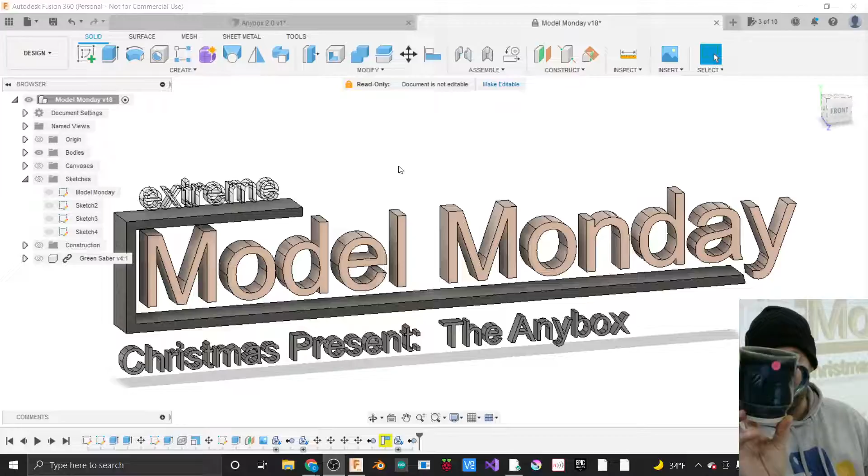Here's something I pulled off of our pottery wall. So if you're short a gift for somebody, we've got a lot of pots for sale over in the Mr. Rogers Pot Shop here in the Milwaukee Makerspace. And unfortunately, there are no boxes with any of those pots. And a lot of the stuff that you make doesn't have a box, so you got to wrap it somehow. And it's much easier to wrap a box than it is to wrap a mug or a bowl or a random project you made here.

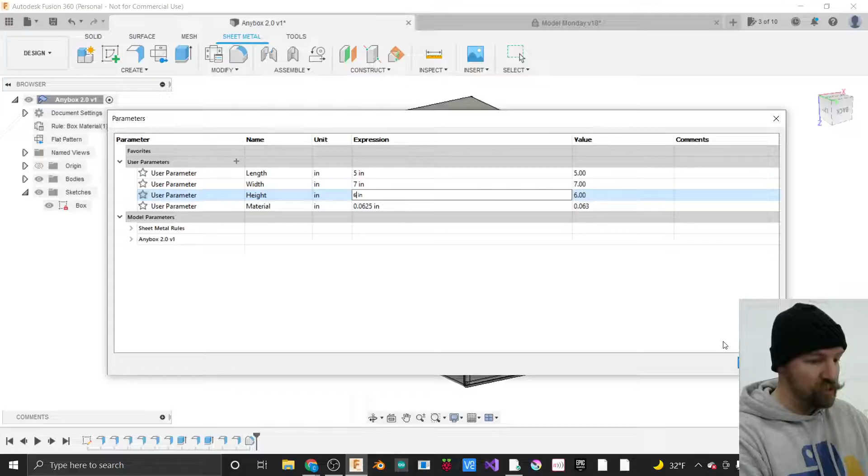So the idea is we make custom laser cut boxes. Here is a box, and this box I call the AnyBox because you can change its sizes by changing these parameters here. So I've got a length parameter, a width, a height, and then a material thickness parameter here. And I can change those measurements based on the gift in front of me, and then push OK, and then I have a new box that I can laser cut out and fold up and stick my gift in and then wrap it.

So without further ado, let's kind of just jump in. So I'm going to close my AnyBox project here. Let's choose to save it just in case. And I'm going to open a new document here. So I'm going to come up to my new design plus button up here in my tabbed workflow up here at the top. And I've got a blank document open here.

So now we can start by creating a sketch. You know, in general, we start by creating sketches, and then we take those sketches and we turn them into three-dimensional shapes. And we're going to do that same procedure here. So I'm going to click on my Create menu, and then, you know what? Let's pause. Before we create our sketch, let's create some parameters first.

So I mentioned we were going to use, this is going to be a parametrically driven box. So if we first click on the Modify menu here, and we scroll down to the penultimate option in this menu list here, which is Change Parameters. If we choose this Change Parameters option from our Modify menu, we get our parameters window that opens up here.

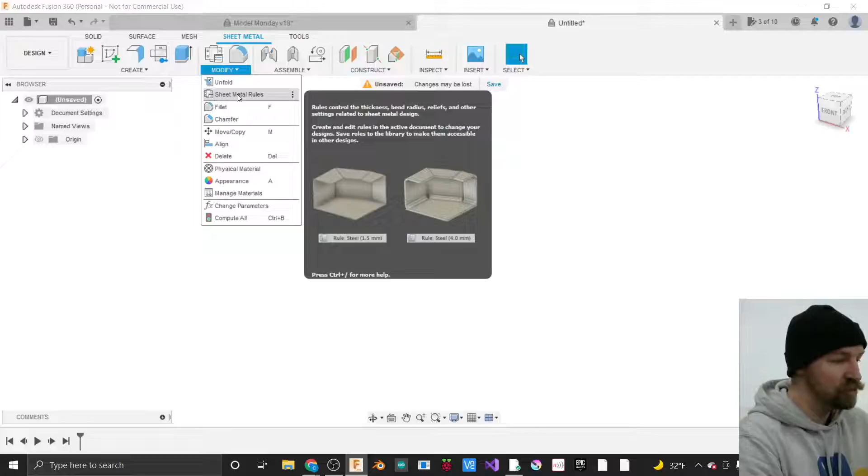Now I probably have more options here than you guys do if you haven't used sheet metal before, but I'll make a new one just like you would have to. In order to make a new sheet metal rule, hover over an existing rule and hit the new rule option that pops up next to it. Next to any one of these, we'll have a new rule option that pops up.

Now we've got our new rule window, and we can call this something—I've called it cardboard before. In fact, I don't have one called cardboard here. Cardboard. And then we can give it a thickness, and the thickness of this cardboard is a 32nd of an inch for myself, but feel free to make it whatever thickness you want.

Our K factor is going to be half of that. Usually for most materials, our K factor is half of our material thickness. So if it was a 32nd, it's a 64th.

Now, like I said, you can do math here too—so if your material is 0.03125 thick, I could just say divide that by 2. Oh, I lied, I can't do math in this K factor field—it won't let me do pluses or minuses, it only lets me type in numbers here. So half of 0.03125 is like practically nothing—0.015625?

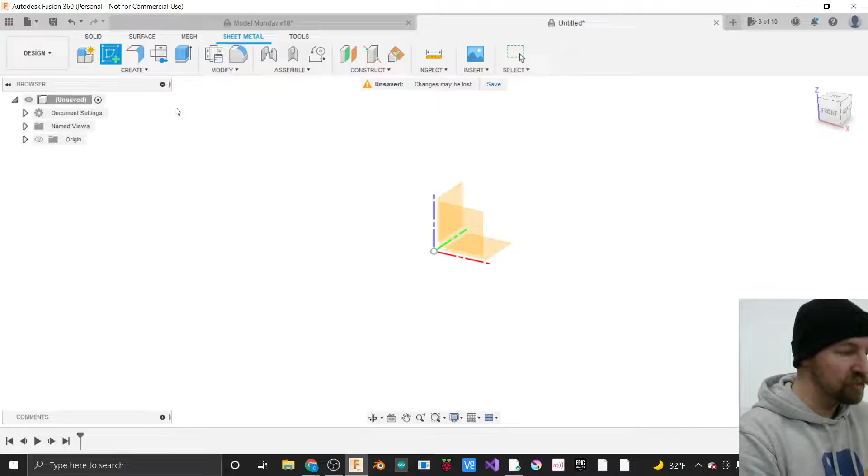Now once I choose to create a sketch, I've got to pick a drawing surface to draw on. We've got these 3 yellow imaginary surfaces out in our workspace, and I can pick one of these 3 imaginary workspaces to start my 2-dimensional drawing on. I'm going to go ahead and choose the one between my blue and my red axis here, my front. When I do that, I'll spin around and be looking right down at this 2-dimensional surface.

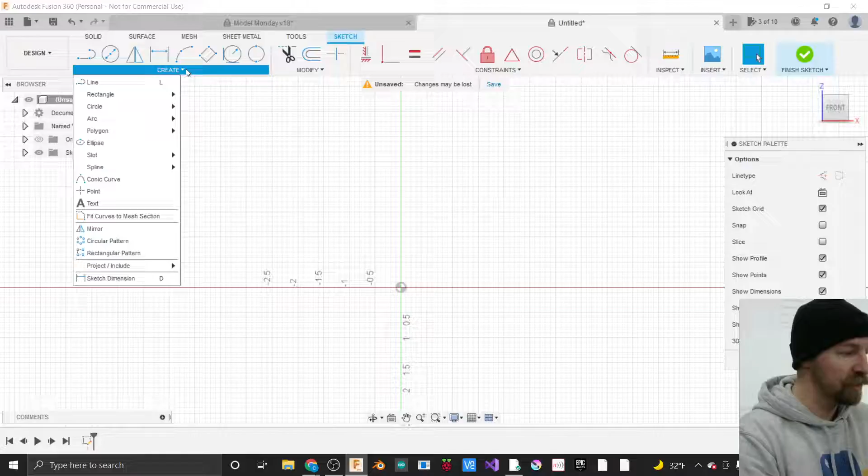And we see I've got all my drawing tools up here at the top. All I need to do is draw a box. So I'm going to come to the Create menu and come down to Rectangle. I'm just going to choose a 2-point rectangle. You could make a center rectangle if you really wanted to, but I'm going to choose a 2-point rectangle here.

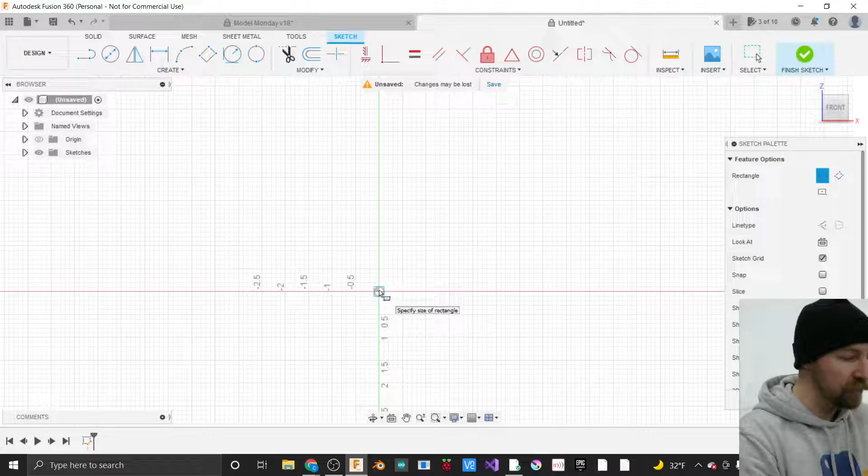I'm going to click to place the first point of my rectangle right at my origin, right at the middle of this workspace where my axes converge. I'm going to click to place the first point, and then move my mouse out. Now here is where we would normally start typing in some numbers. So I would type in like 5 inches, hit my tab key, type in 4 inches, and start making my shape that way.

But we've got... What did you do to get to the rectangle? Oh, so I went to Create, and then Create Sketch. Oh, okay.

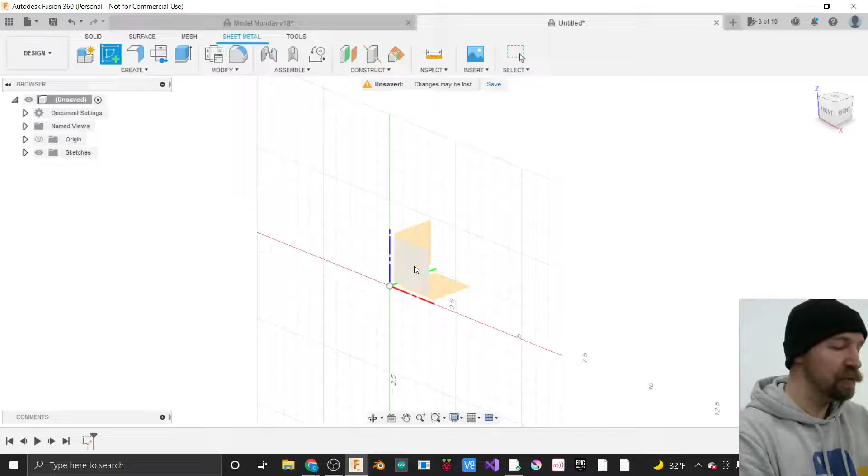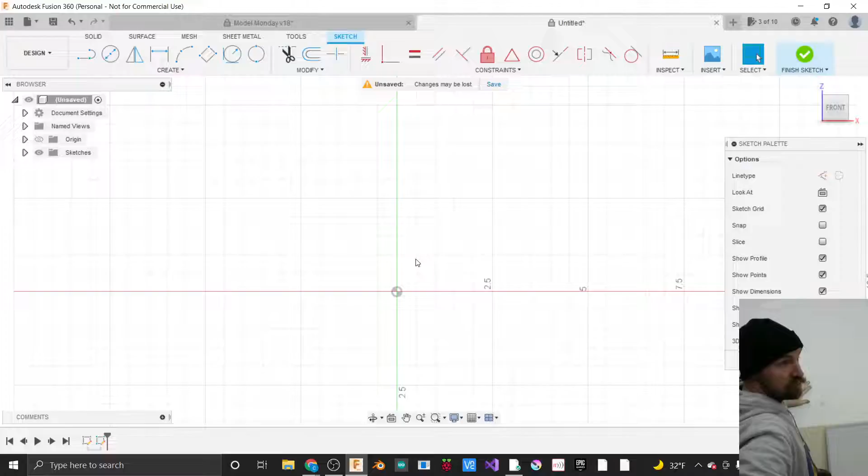And then we've got these 3 drawing surfaces that we can pick from. You just need to select one of them. It doesn't really matter which one, but you just need to select. This is like a 3-dimensional world we're looking at. These 3 yellow squares are like imaginary 2D surfaces that we can start our drawing on. So like in this room, you couldn't have started sketching in midair, but you could start drawing on this wall. You should not draw on this wall because this is the makerspace and walls are not for drawing on. Those three surfaces are kind of like the walls and the ceiling. You have to click on the plane.

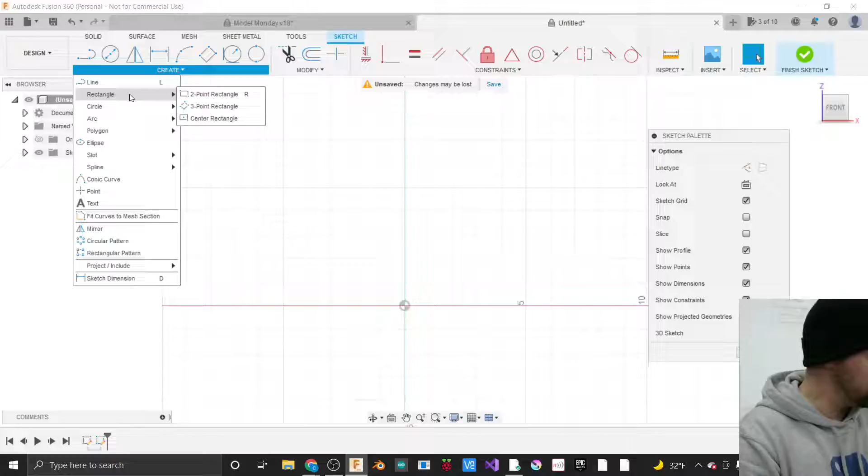Cool, so now all the tools at the top have changed. We're now in our sketching environment. We've got our sketch palette, and that's how you know you're editing a sketch. Now that we're editing the sketch, we can create some geometry on it. So in this Create menu, I'm going to come down to this rectangle option, and choose this 2-point rectangle.

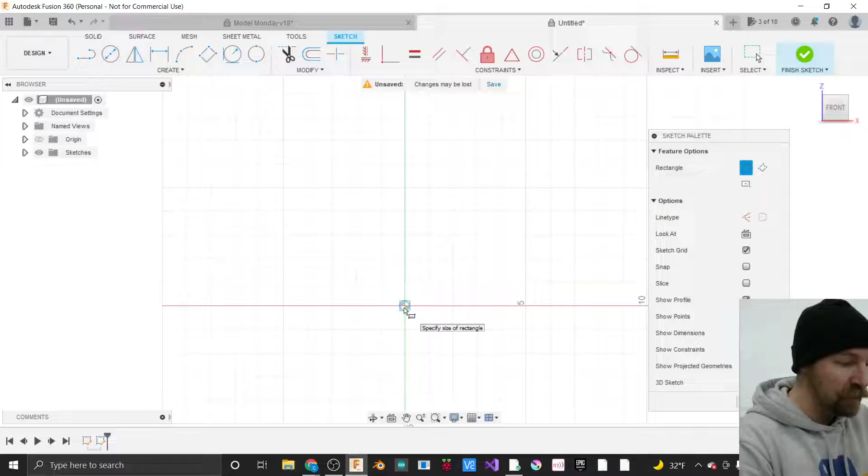Fusion is great about tooltips. So if you're ever not sure what you're supposed to be doing, if you just stop moving your mouse, it's going to tell you what to do, which is great. I'm good at following directions. So it says I'm supposed to place the first corner. I'm going to click one time and place that first corner. And now if I stop moving my mouse again, it says I'm supposed to specify the size of a rectangle. So if I move my mouse up, now I could specify that size.

We could type in a unit here, or we have specified user parameters that we're going to use. So instead of typing in like 6 inches, I could type in one of my user parameters that I named. So like this is going to be my height. If I start typing in height, I get that height user parameter, and I can hit enter to select it. Now if I hit the tab key, I bounce back and forth between my two units of measure here. Let's call this my width.

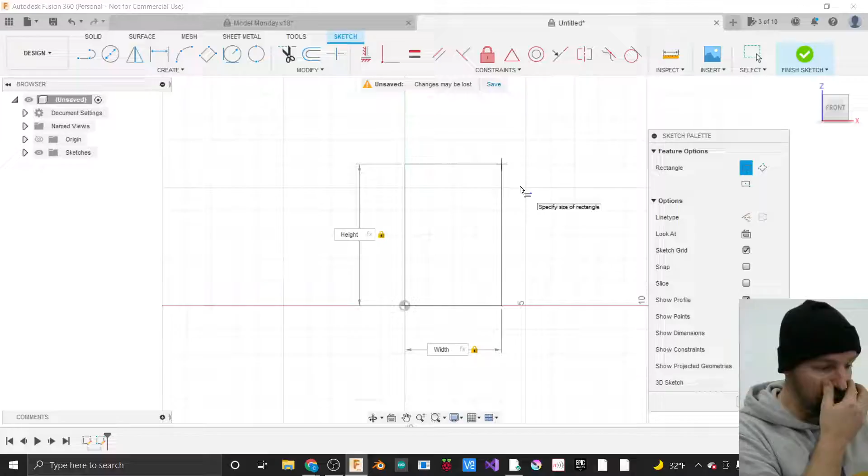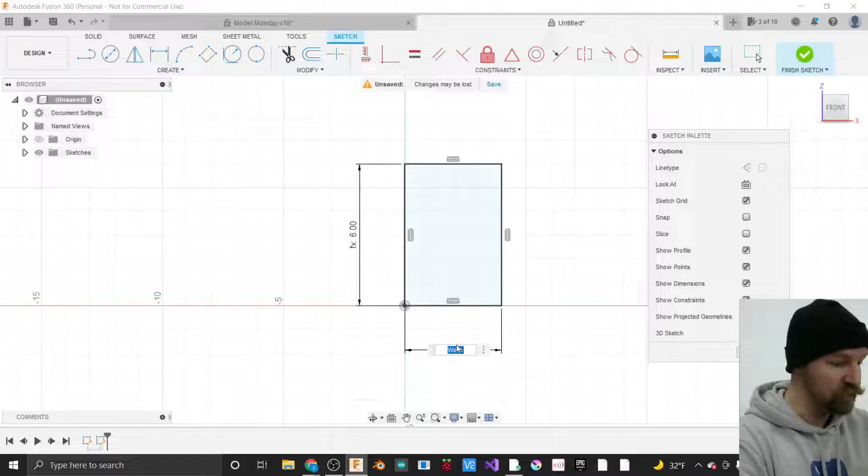So I've got a height and a width, and I've entered those both in, and it goes ahead and converts those to whatever their inch measurement is. But if you double click on those measurements, in addition to moving them around, you can put these measurements wherever you want them to be. You can double click on them and it sees, oh look, that's my width. That's what I'm doing there.

So we've got this sketch here that's called Sketch 1, and I can go ahead and name that. If I click one time, pause, and click again, it lets me rename that. People who are longtime comers of this class know that I'm fanatical about naming things sometimes. Alright, so we've named our box. It's a box, look at that.

The other thing that happens as we draw things is we get some icons that appear at the bottom of our screen. I'll come back to these later, but know that these icons will start stacking up on top of each other. It's kind of a timeline of events that happen to make our thing that we have in front of us. Right now it's just a sketch, so that's all we see.

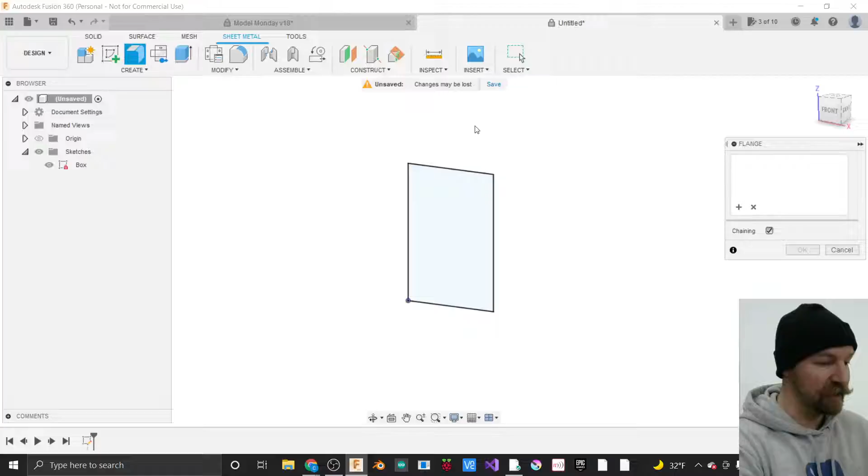So if we just choose from that Create menu in our sheet metal workspace here, that Flange Command, now we just have to hover over that box that we made and click on it. So this flange in this case is making ourselves a flat piece of sheet metal of whatever sheet metal rule we choose here.

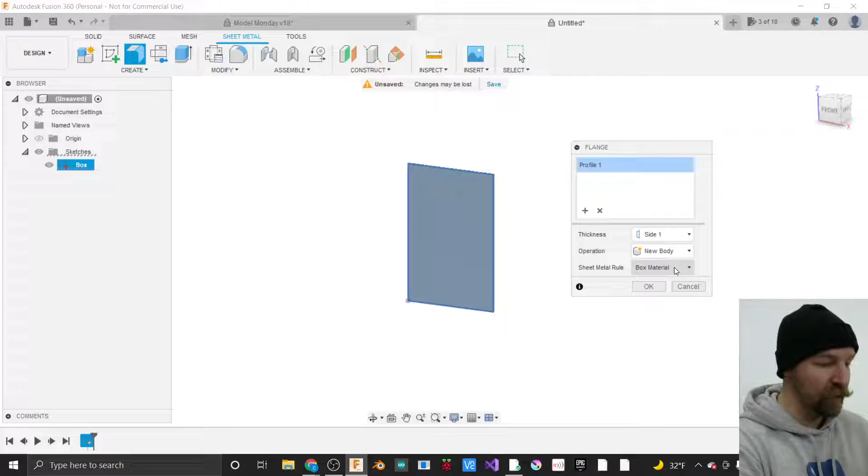So the thickness, if I zoom in, you can see it does indeed have thickness. The thickness of this material is determined by the sheet metal rule that you choose here. So that's why we went ahead and picked that ahead of time. If I say, oh, this is hardboard, this is the thickness of that hardboard rule that I specified. If I say, oh, it's cardboard, then this is the thickness of that cardboard rule that I specified there. Does that make sense? Cool?

I'm still trying to make a rectangle. I don't know what happened with the dimensions.

So yeah, now you can just let go of your mouse, and now you can type in your width. There you go. Excellent. Now hit the tab key, and now you got your height that you can enter in there.

You know, here's the thing that I always forget to mention to people. If you go to the document settings there, right now your units is set to millimeters. You can change that to inches. Oh, and then you're kind of zoomed way in. So now you can zoom out and there you go. Now you got your box.

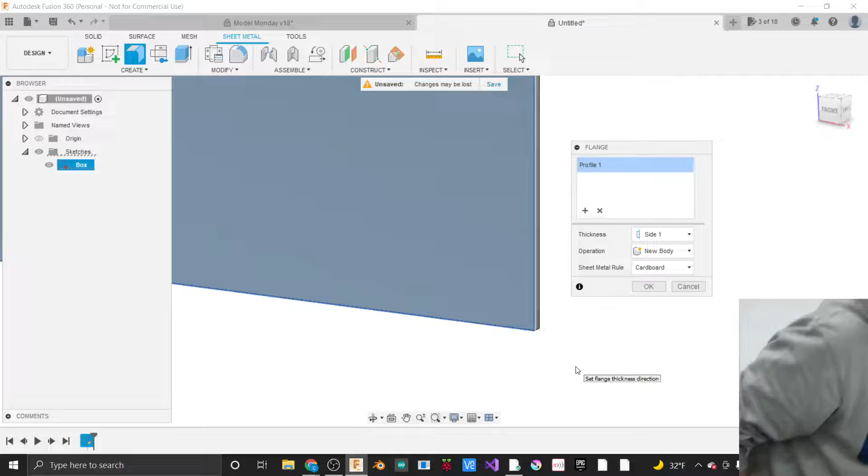Okay, thank you. Yeah, the thing that I always forget to mention to new people is when you first open Fusion, the document settings here has defaulted to millimeters because literally everybody uses them except for us Americans. We still use a measurement that's based on somebody's big toe, I guess. But I grew up with big toe measurements, or freedom units as I call them, so I'm stuck with them. We tried to use a metric system when I was a kid. It totally failed. Totally failed.

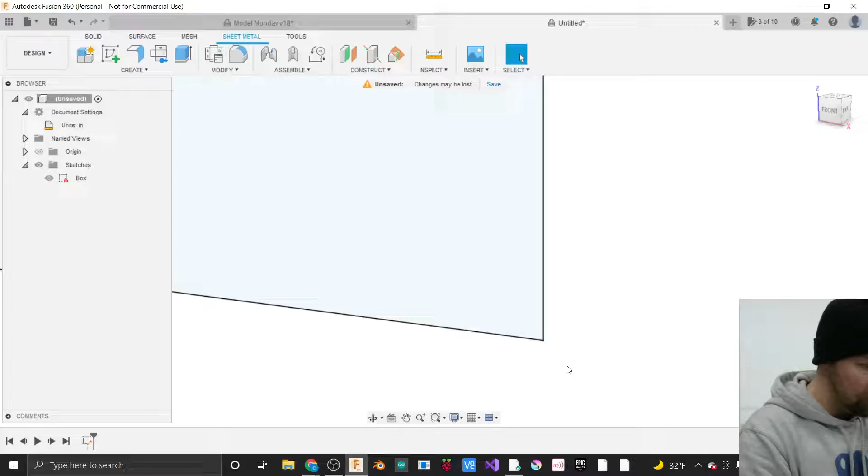All right, now, as I was saying, so now that you got a box, now we can click on the Create menu and come down to the Flange command here.

I'm going to hover over that box and it kind of highlights blue, and I'll just click on it. Now I've got something highlighted, a profile selected, it says here. I can change my sheet metal rule to be that cardboard option that I just made, and then I'll click OK.

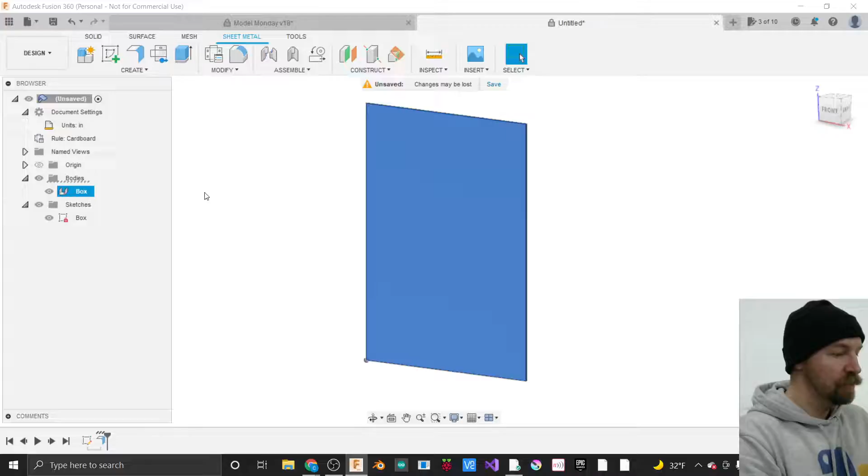Now in addition to that sketches folder, we've got a bodies folder here, and that body has our body in it. This body is going to become our box after a lot more flanges, like 6 more flanges or something like that. In order to make that box, we're going to use that flange command several times.

So if I come over here to this Create menu and choose this flange option again, if I zoom in and hover over, I'm picking the side of the edge that's towards me. So this is the side that's away from me, this is the side that's towards me. I'm going to do that on both sides of this box here.

So I'm going to come in and pick both of those lines, and now I've got a little blue arrow, and if I just drag this blue arrow towards me, it makes myself a nice little sheet metal bend there.

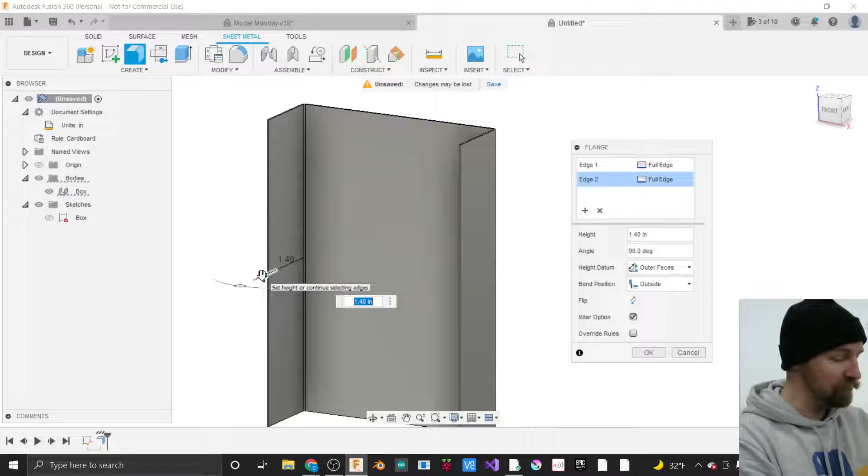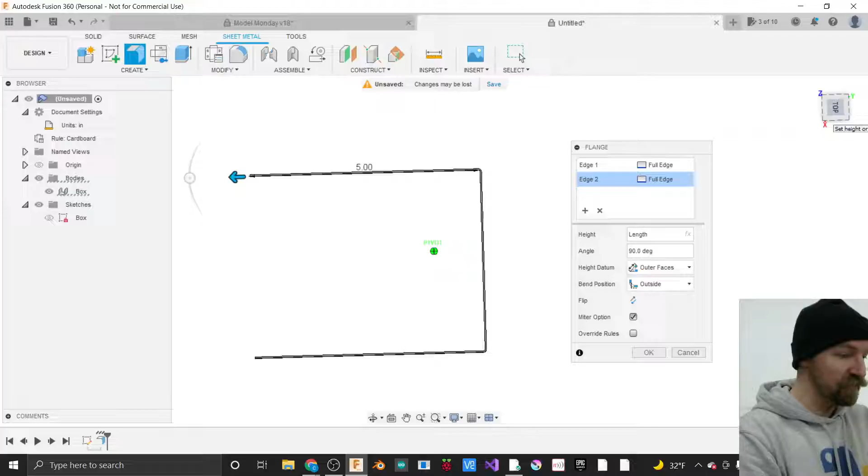Now the distance we're going to go is going to be the other user parameter, the one I have not used. I'm going to guess that I have not used length yet. So if you used width the first time, you use length this time. This is why I choose to make them all different measurements to begin with, because now I can see if I'm choosing the right one - if I was not choosing the right measurement, they would be the same size. You can see that this leg is longer, so I know I'm using the right parameter here.

All right, so we've made our first flange here, and we've got the length specified literally for me as length. And I'm going to say OK.

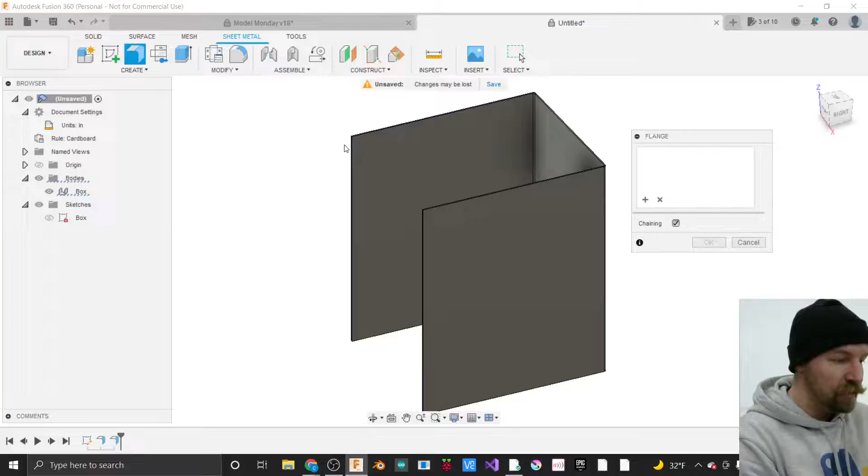Now I'm going to do that one more time here to kind of enclose our box. So if we come up to the Create menu again and choose the Flange option, I'm going to zoom in here, and I'm going to again pick on like the inside corner of this box, and pull it out towards my other object here.

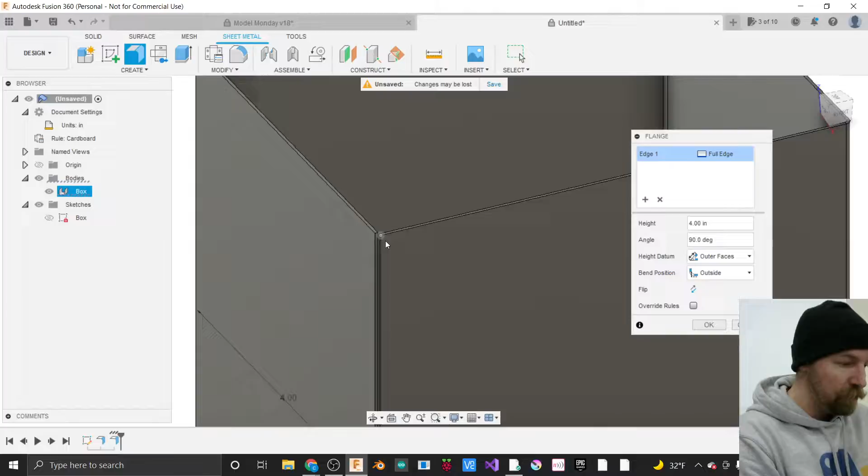And now I'm going to enter in the distance here for the height, which is going to be, I believe, width. Yes, okay, good. So here, if I'd entered the wrong one, length, you'd go 'oh, it went way past where I wanted it to go, right?' So I entered the wrong one, so now you know that it's like, oh, width is the one I want here.

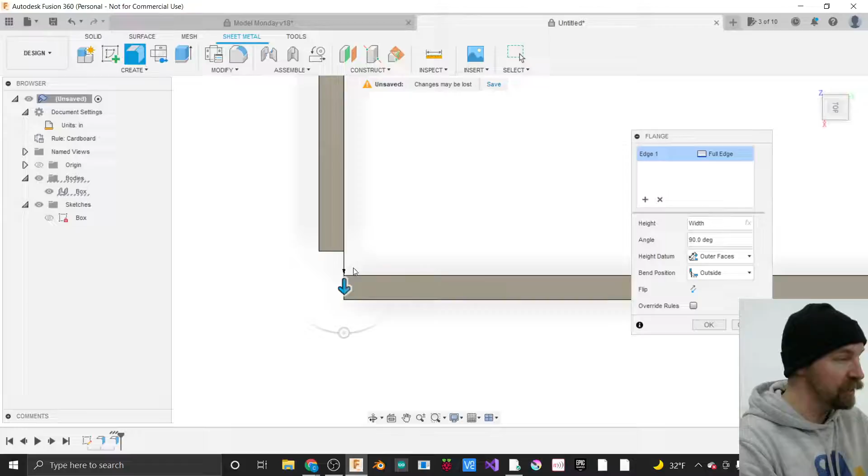And I'm going to look at it from the top down here and just kind of verify that it is indeed stopping before it gets to my corner. I don't want these things to be joining each other. Does anybody have theirs joining each other at this point? Cool, that's great news, because it allows me to point out something I totally forgot to mention the first time around. But it's a teachable moment - this is a wonderful thing.

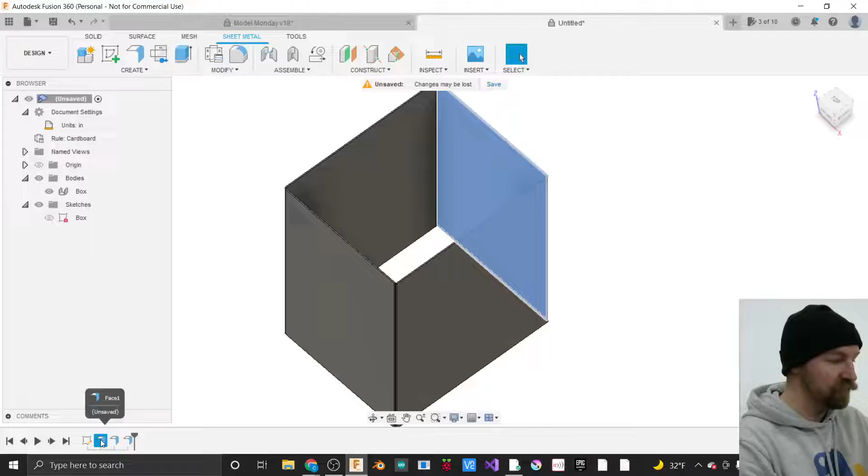So down at the bottom, you know that we've got this kind of timeline of events that have been happening. At the bottom here, we've got our sketch, where we made our sketch the first time, and if I click on it, you can see, oh, look, sketch highlights. The next thing that happens is we made that flange, which is that flat surface. And the second thing that happened was we made our first two bends in this box, right?

If I right-click on any of these items in my timeline and go back to Edit Feature, now I'm going back in time to when I was doing this operation, and we can point out something I forgot to mention that is very crucial - the bend position. So I can choose to bend this on the inside or on the outside, and there's a really terrible illustration that doesn't show you very large here, but if you choose to bend those, I believe on the outside...

I believe that's what we want to do. If we change those to outside - yours are probably set to inside - so if we change those to outside, then we'll be good there. And now I can say OK. And now when our third bend happens, then they do not touch each other.

Now we want to make one more flange here because it looks like mine are still touching each other. Oh, let's take a look.

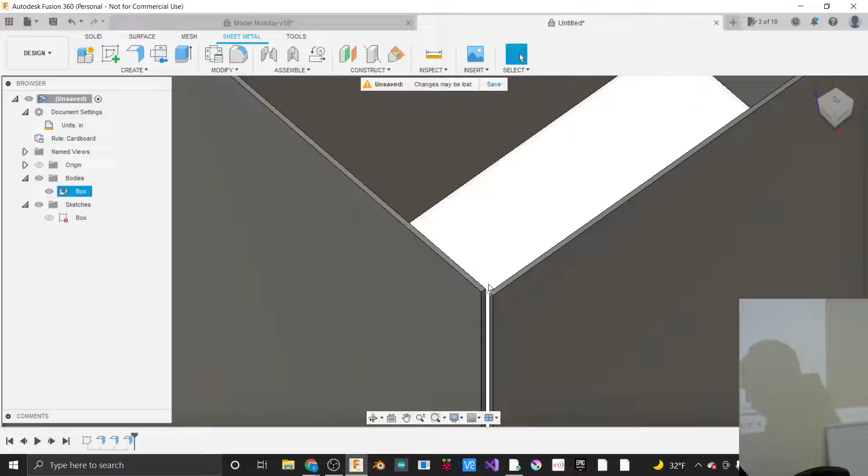There we go. Now we're good, right? Yeah, okay, cool. Carl, question. Okay, on the fourth flange...

I did the outside bend and it wanted to intersect. The little angle thing came up and I set it to like 89.9 to give me a little gap. How should I have set it? On this very last one we're doing here?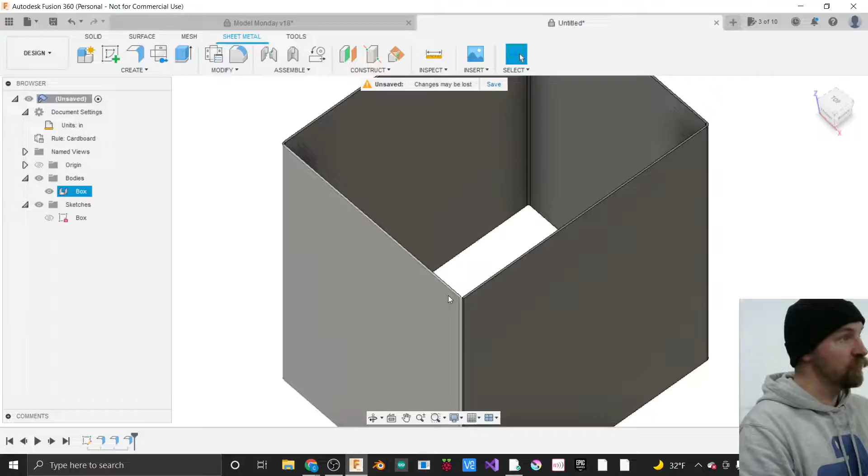On this very last one, so I'm going to go and grab my Flange Command here, and I'm going to pick the inside edge here of this. This is the very latest flange that we bent around here, so we just bent this side around here.

And if I come in here and choose that inside edge, instead of choosing the bend position as outside, I'm going to choose it as inside. So now if I choose to make that inside, now when I come and look straight down at it, you can see that they're not touching.

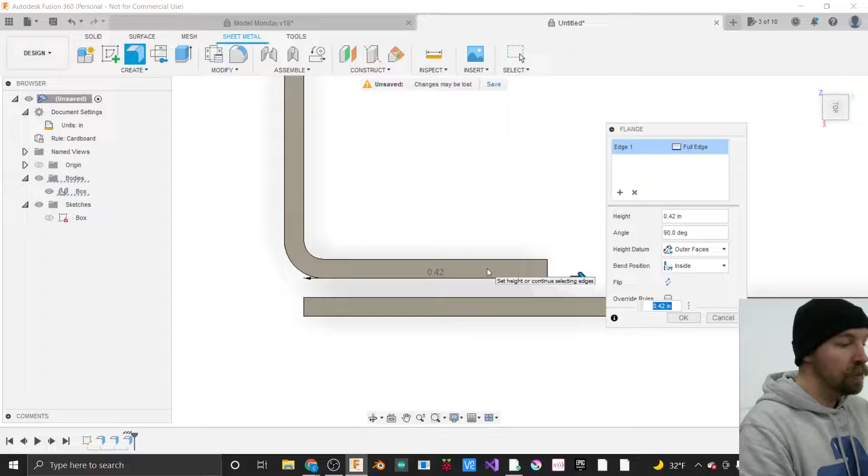Okay, that doesn't answer the question. How did you get the gap between the fourth flange and the original first surface? Oh, this gap right there? Yeah, so how did you get that?

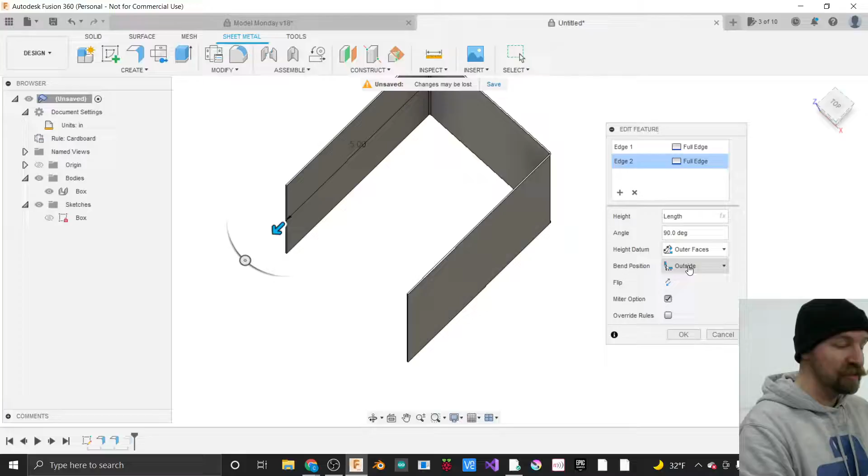So that happened for me naturally. So when I chose to make the first, all these bend positions are made on the outside. That happened for me naturally. Did that not happen for you naturally? Where you've got the gap there?

It started from the other corner, maybe. Oh, I don't think so. Because I did the length and I got the... that's unselected. Yeah, if I choose the inside corner there.

Yeah, let me come take a look what you got going on. Okay, I was using the inside corner on all of those. Let me try it. This is a wild ass guess here. That's the outside corner. Yes. Right, that's what I'm...

Flange. Outside. Okay, now I'm choosing this one. Flange. Outside.

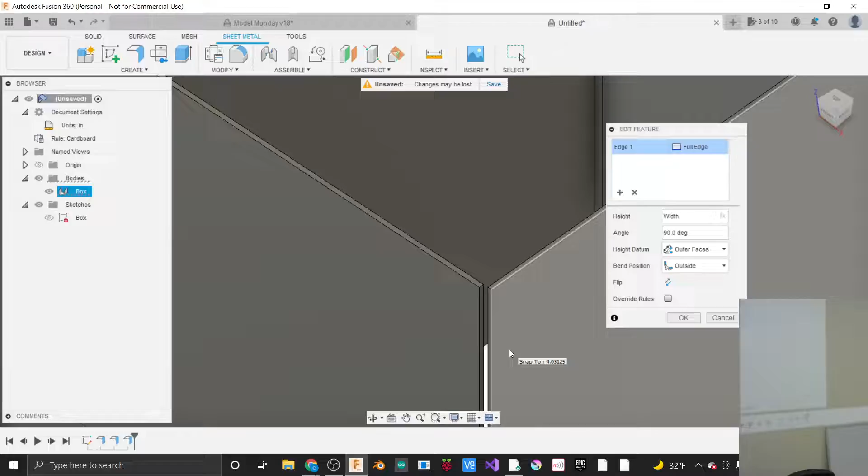So I'm asking, how did you get a gap? Yeah, mine just appeared there. So...

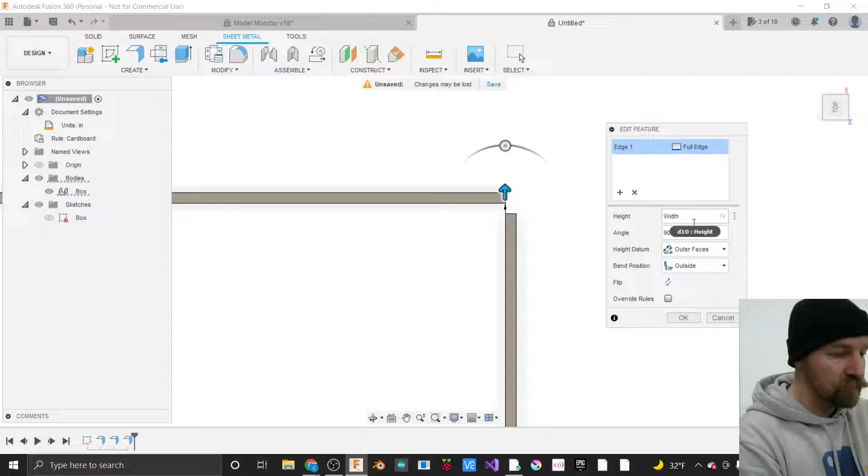I don't know. So we definitely want to have a gap. And I'll tell you what we want to do if you're going to try to get this gap here, and you're not getting it naturally, I would say that we should try doing some math in our measurement unit here. So instead of a width, you could try a width minus your material. If you subtract your material thickness from your width, the key is you don't want to have those things touching.

So it may just take a little fudging like that. I don't know why we're both doing it the same way and we'd have different results, but sometimes Fusion is weird. Or we could have version differences going on here somehow. But I would say, that works.

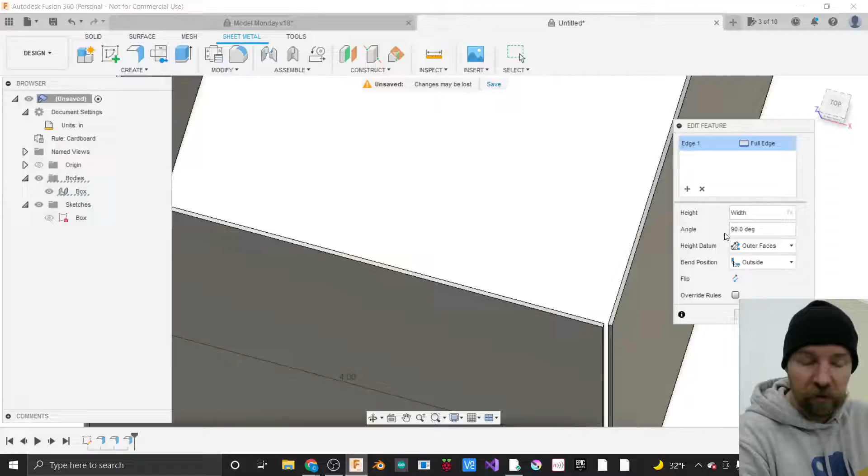Yeah, subtract your material thickness maybe. We just had an issue here live in person where somebody was doing this measurement and getting these walls touching, and we don't want that specifically, so we just had to subtract our material from it, and you can see it bounces back a little bit. So if you have that as an issue, you could try subtracting your material from your distance there.

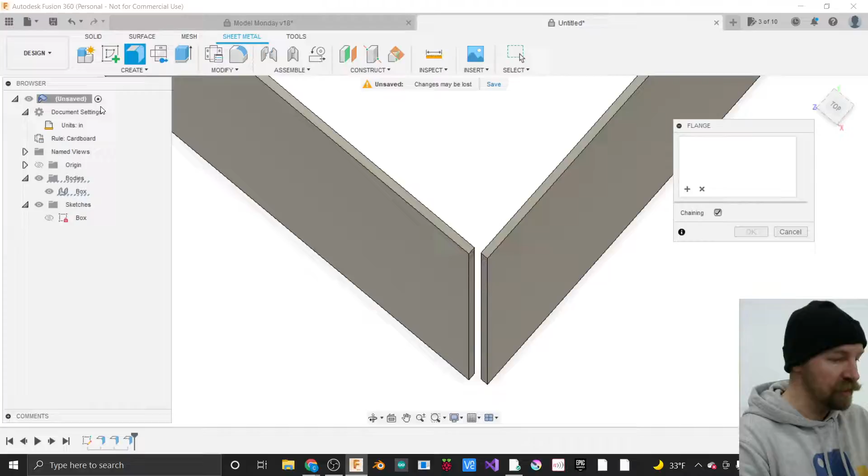We're going to be doing that later in the course of the drawing. I just didn't expect to do it this early. So I'm going to click OK. And now I'm going to make one more flange here to close this out. So I'll click on Create, and then I'm going to grab my Flange tool again. This time we're going to again specify the inside edge.

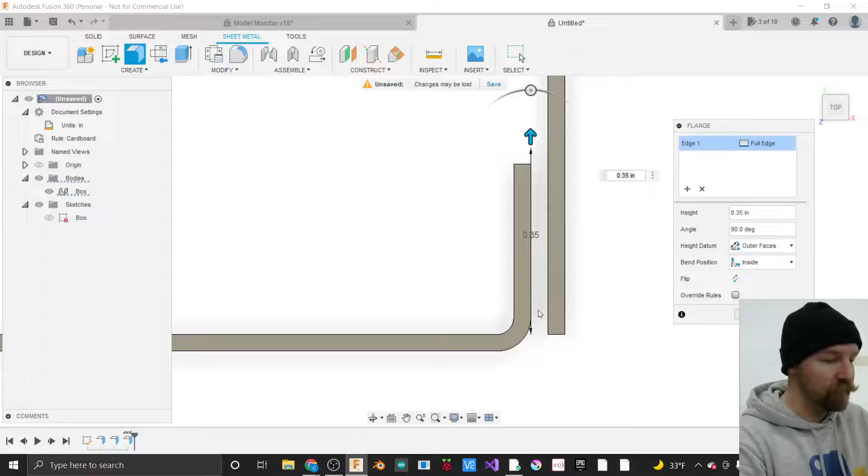And this is the edge that I just made. So this is my brand new edge, my brand new flange. And this time, instead of outside, because if I choose outside on this, for me, I end up with some edges that are touching and overlapping, and that will not unfold properly. My bend position I'm going to set to inside, and that'll give me a properly fitting box here. This gap, if you remember, is a 32nd of an inch, and in cardboard, that is plenty of tolerance.

Those things will glue together just fine. So, and for a length here, or a height, I should say, for this measurement, I'm going to say 1 inch. You could specify it as some percentage of your height or your width if you wanted to, and then it would change constantly, but I'm just going to type in 1 because it just needs to be enough for us to glue together. And then I'm going to say OK.

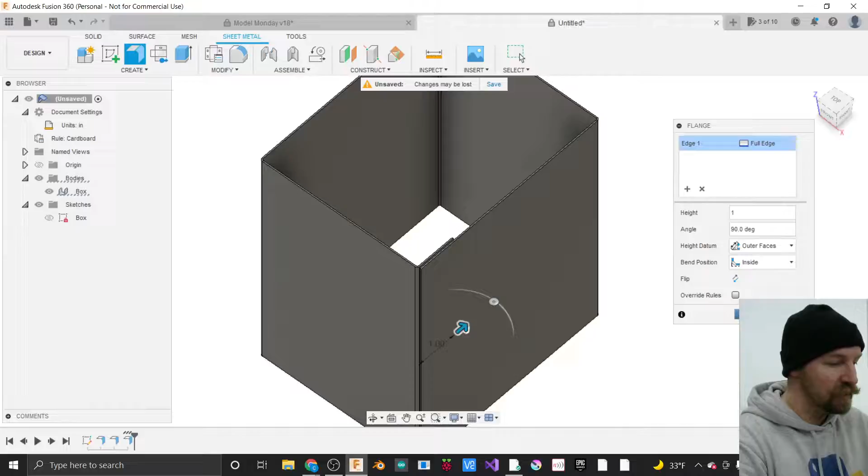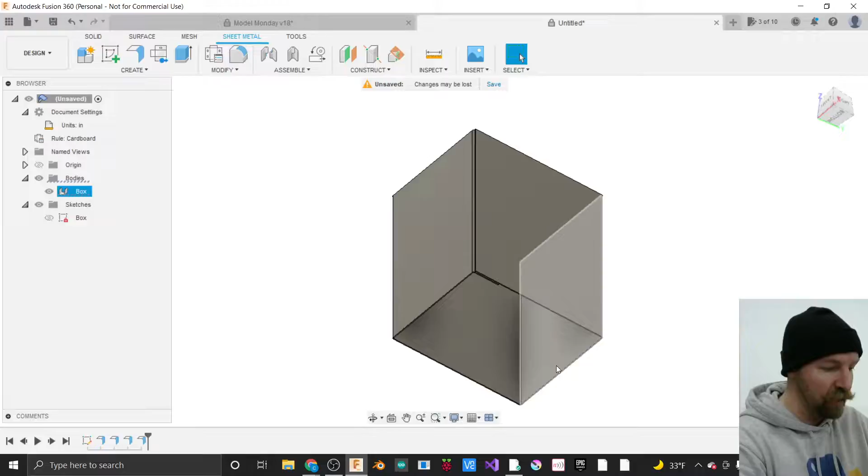Alright, so now let's create the bottom of our box. So we'll do that, you guessed it, with the Flange command. I'm going to rotate down using my navigation cube up in my top right hand corner. I can kind of click and drag and rotate that so I can see the bottom of my box. And now the bottom of my box I'm going to close in with some flanges. So if I click on the Create menu and I choose the Flange command here,

If I specify the inside edge of this side and the inside edge of the opposite side, so I've got the inside edges of two opposite sides selected here. Now when I grab my little bendy tool thing here, or my little arrow, it drags them inward, right?

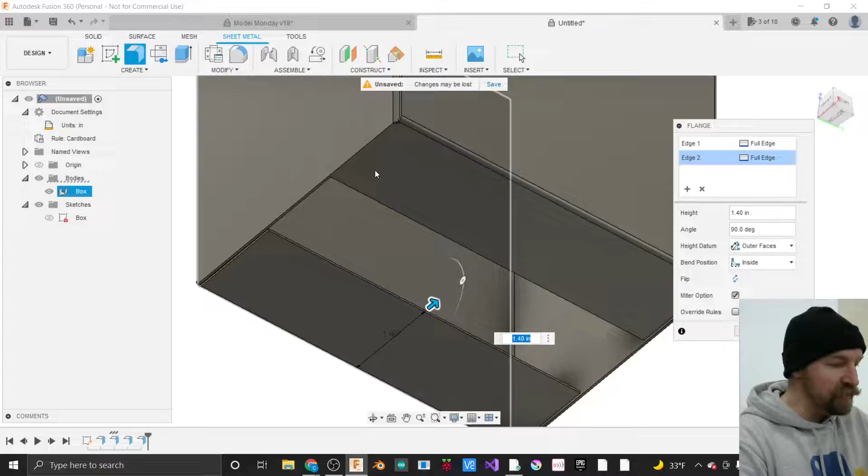This is another one of those occasions where we'll have to look at the side, and if these flanges are intersecting with the body here, right now I'm set, my bend position is set to inside, and I've got a little intersection, so I'm going to change that to outside. And hopefully I'll be good to go there.

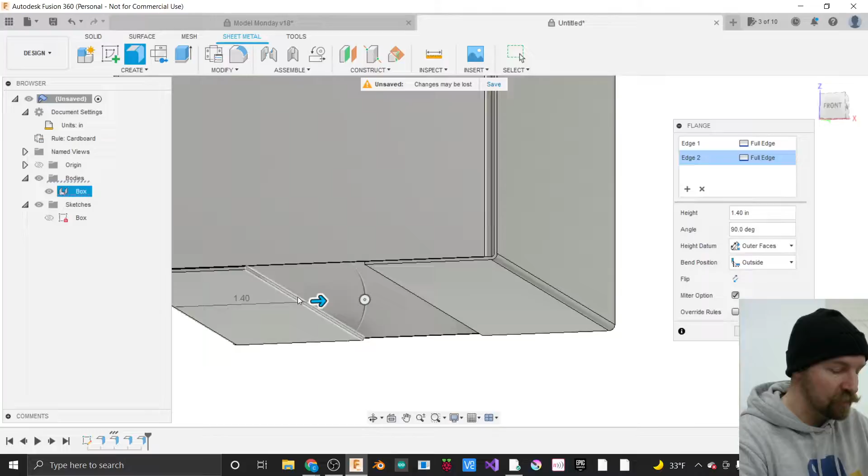Hopefully. And now my height, the distance that I'm going to extrude these, or bend them, or flange them, I guess you could say, is going to be either my width divided by 2 or my length divided by 2. Okay, yeah, it's my width. So I'm going to take my width, and I'm just going to say width divided by 2. I could put some spaces in there so that's easier to read.

You know what I would have done wrong if they don't meet up correctly? Well, it could be you need to use your length in that measurement then. Oh, I mean in terms of like if you're looking at it straight on, slightly offset. Oh, so that is totally fine. No. Okay. So, you know, it's just this is your bent side, and if you go over to this side, this one does not have a bend there. So it's just one of those two faces that will have that issue going on.

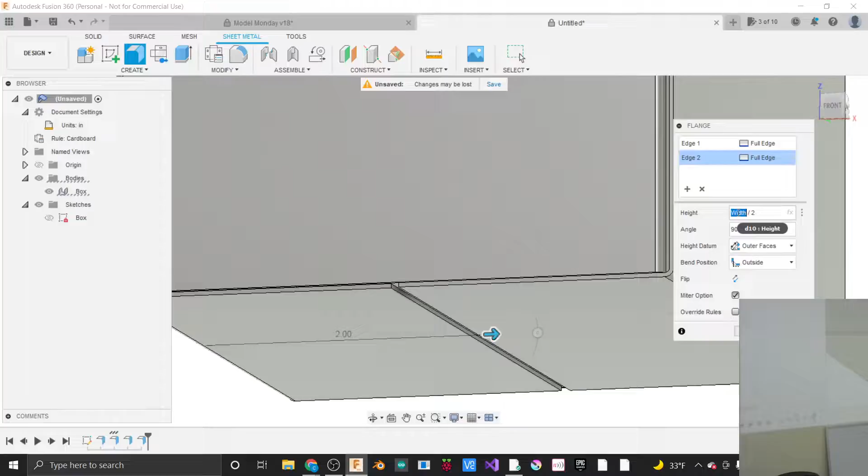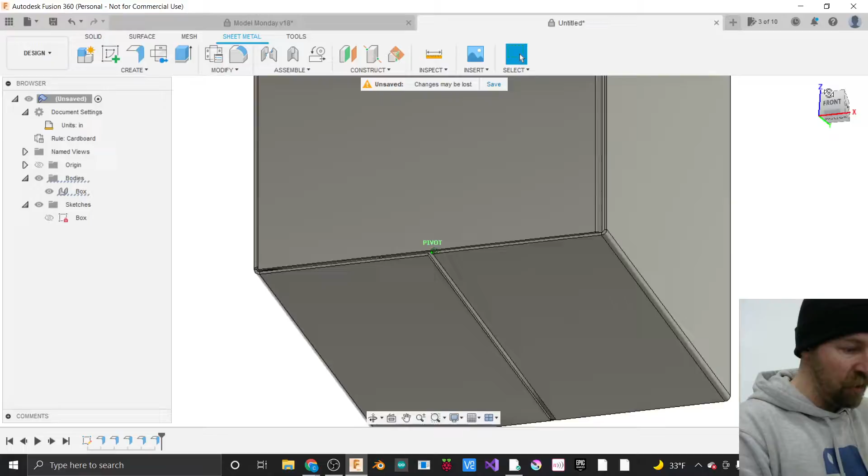Okay. Yeah. And again, that's a 32nd of an inch, which is totally fine in cardboard. You'll be good there. All right, so we've got our bottom, first section of our bottom set, right? I'm going to say OK here. And now we can make the other section of our bottom here, but oh gosh, do I need to...

I hope I didn't make a mistake already. Oh no, I can see it. Okay. So, in order to make the next section of our bottom, we need to extend up a couple of edges. So, I'll show you what would happen if we don't do this. If I just try to make this flange the same way I made the, oh boy, that's interesting. Create a flange.

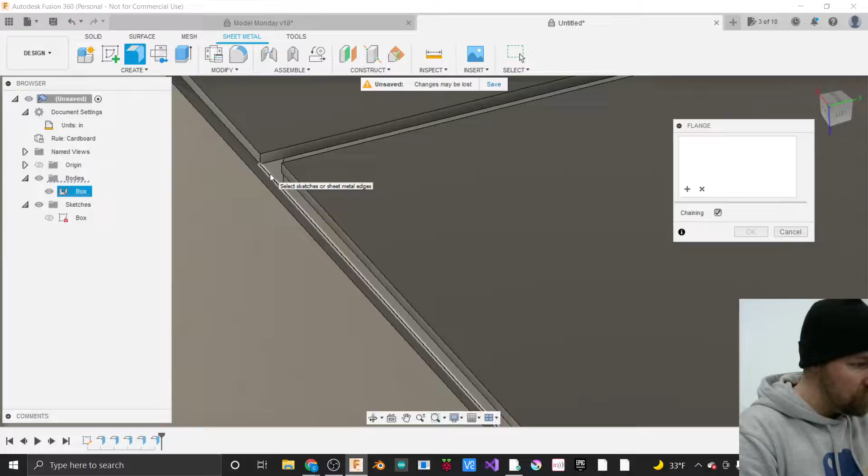Oh, look at that. I've got some joined edges there. So I just tried to make a flange and I realized I've got some joined edges here. So I'm going to need to take a step backwards, because apparently we're going to need to do this again. So I'm going to delete that last flange that I just made.

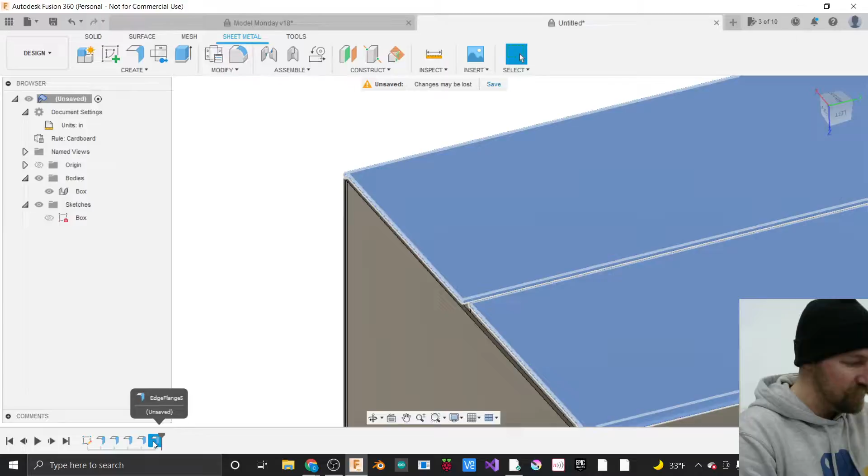I tell you, when I do these before class, it always goes real smoothly.

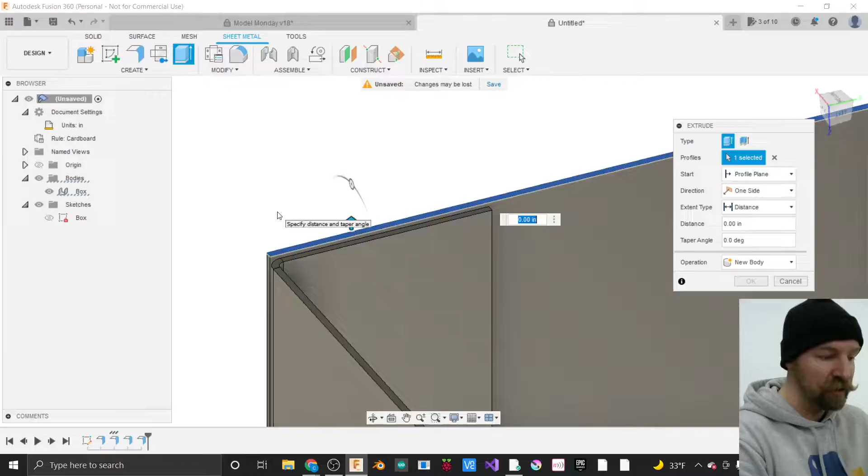We need to make a couple of extrusions here. So I need to create some distance between the flange we're making and the edge of our surface. If I come up to the Create menu and choose the Extrude option, I'm going to choose that edge over there. I guess I shouldn't say edge - this face, which is kind of the side of my piece of sheet metal. And then I'm going to choose the face that is the opposite side of the sheet metal.

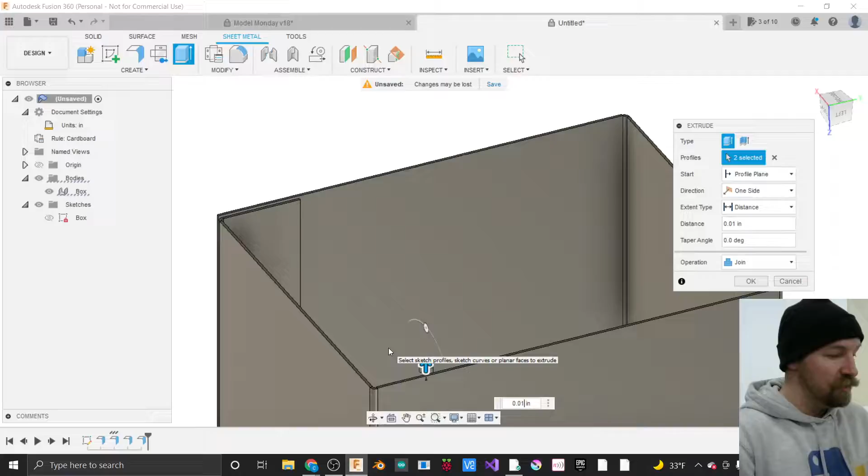And I'm going to extrude this up a distance of 0.01, because I just need to create the tiniest little raise in that wall there. So if I zoom in, you can see I'm raising it up just slightly, 0.01 inches. And I'm going to say OK.

And now if I grab my flange tool one more time, now those edges - this is that operation I just did where I choose those inside edges of both of those, and I extrude this in. This is that distance of width divided by 2.

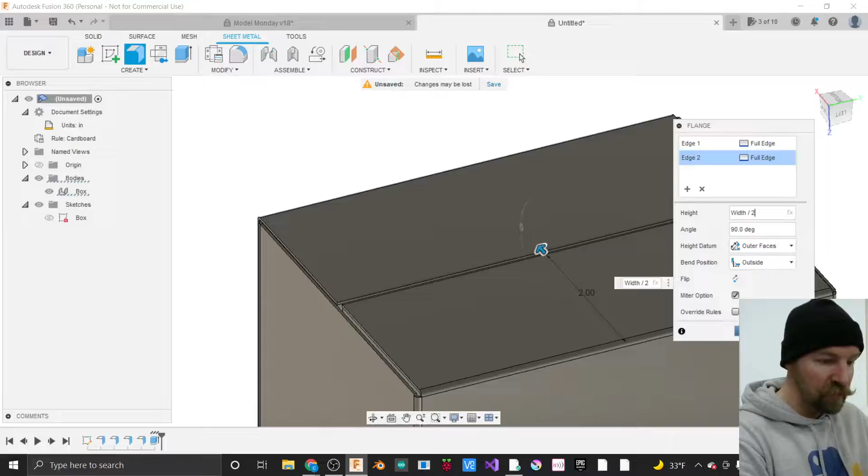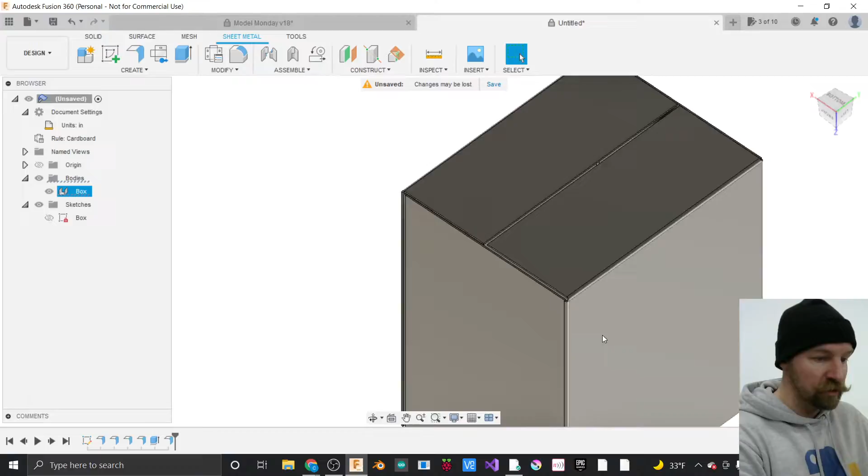Now I don't have edges that are touching each other. Edges that are touching each other are bad, so we're going to do that operation one more time. And here, Harvey, this is that issue you were saying - I've got a little gap here, and I do not have a little gap up here, and that is because of the edges I chose to expand to make a flange out of. It's just that one of them goes all the way to the edge and the other one doesn't, because there's a little corner piece that it cuts out when you're making sheet metal stuff.

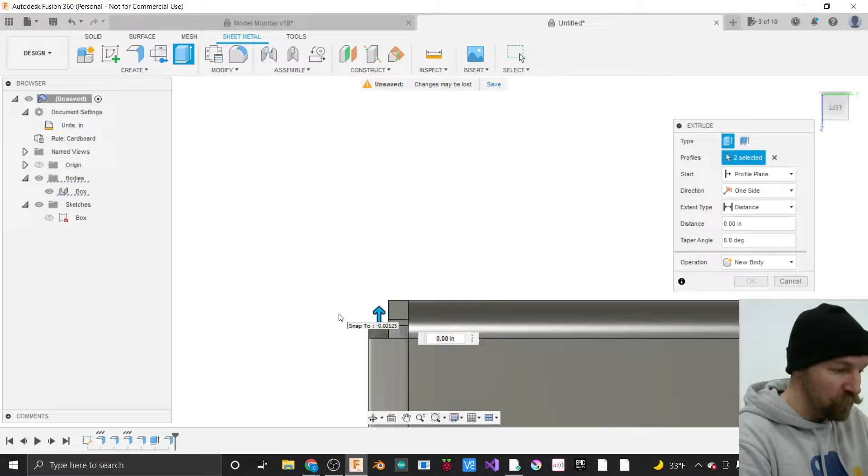Alright, so we're going to do that same operation again. We're going to extrude the two opposite faces - this face here and this face way over here - up just a little bit. So I'll grab my extrude option and grab both of my little edge walls there. And this one is going to have to go up a little bit more. So that other one went up 0.01. I'm going to try starting with 0.03 here, and hopefully that'll be good.

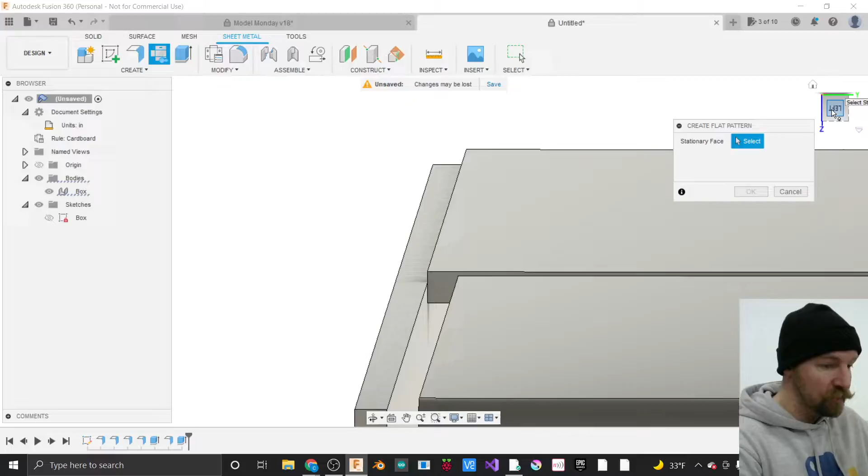I'm going to hope that having those things touching is not going to mess up my day, and it's not. Okay, cool. I just had to jump ahead a little bit because whenever I see touching edges in sheet metal, I go, oh, is it joining those things together? Please do not do that. I don't want you to join together. Alright, so I extruded it up 0.03.

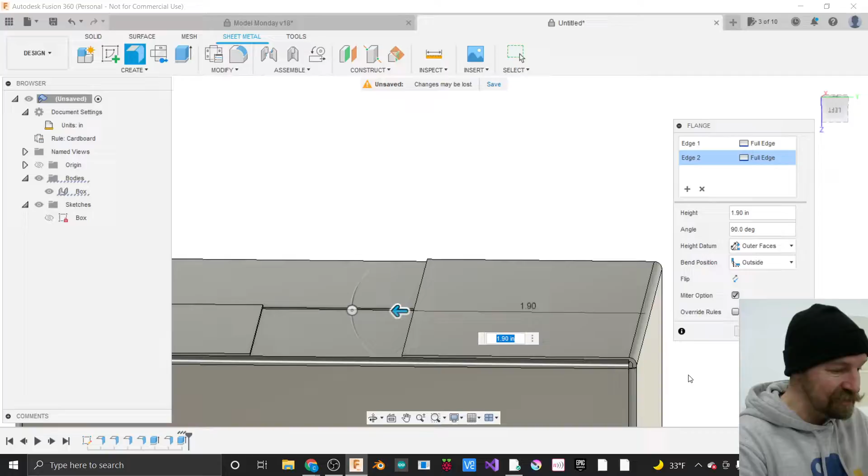Now I'm going to grab my flange tool again. Oh, look at that. Is it selecting that whole thing or not? It's selecting that whole thing. So I'm only getting half of my sheet metal because I've got edges that are touching here.

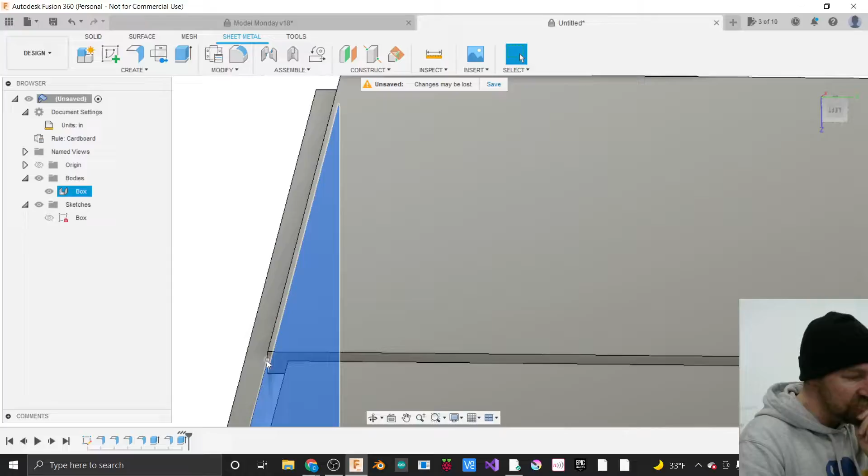And the way I'm going to get around that is in this last operation I did here, where I made this bottom section, because this is where I've got an edge that's touching this face here. These things touching is not good in sheet metal. So if I edit that feature, we have been making these edges the full width of the edge, and they do not need to be the full width of the edge.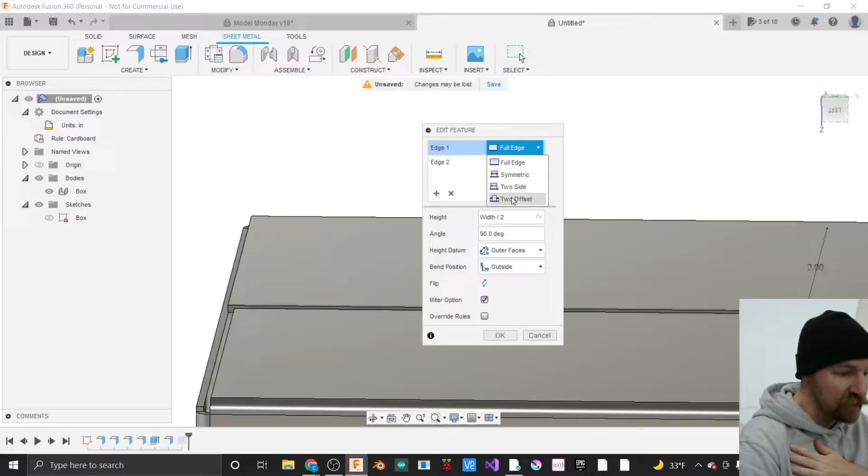So I can take one of them and say, hey, I'd like to have two offsets here, and it lets me just take this and drag it inward. So now it's not the full width, it's just a percentage of that, or a small part of that width, and I can change this measurement to something minuscule, or make those edges line up with each other there. That's a way to get around those edges not lining up that we had before. And I'm fine on this side - those edges are not touching. So I just had to drag in one of those arrows.

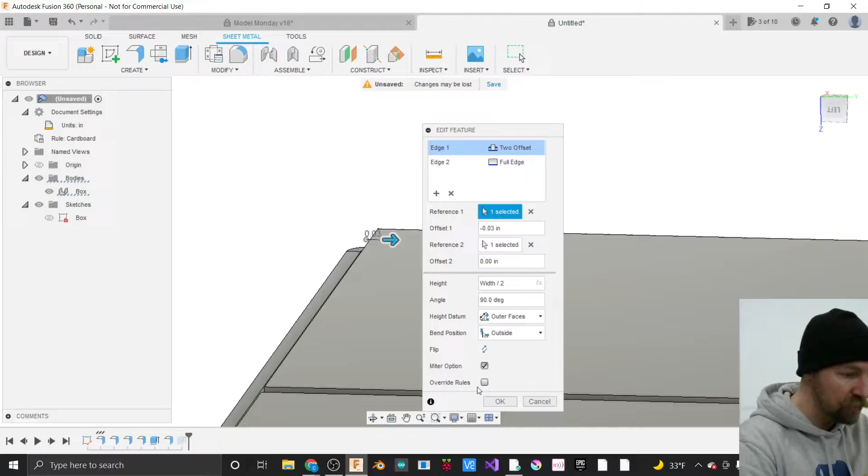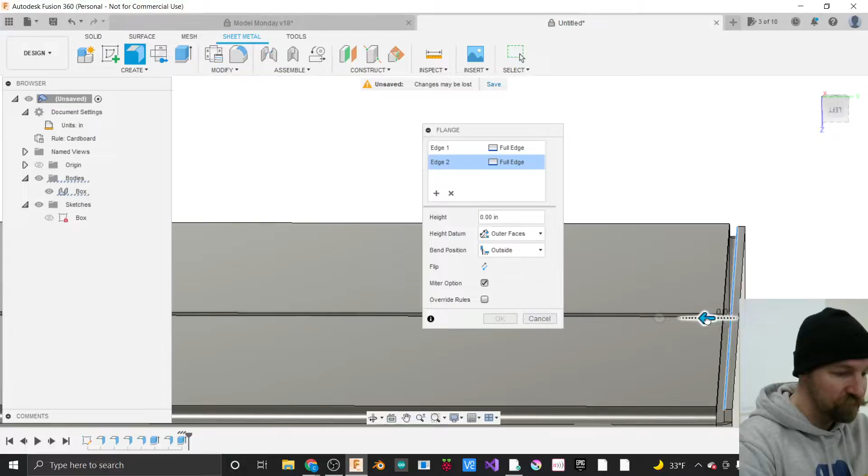Alright, there we go. So now we've got edges that are not touching again, and that's a good thing. And I can grab my flange tool, and now we should be able to come in here and pick these two edges.

If we drag them in, we can see that my things are touching. However, we're going to go ahead and fix that later. So right now I can see that my flanges are interacting with each other, and that's going to be a problem for the unfolding process. But for now, I'm just going to bring them close enough so they're in the center.

So this is going to be my length, right? Going to be my length divided by 2. And I'm going to go ahead and say OK.

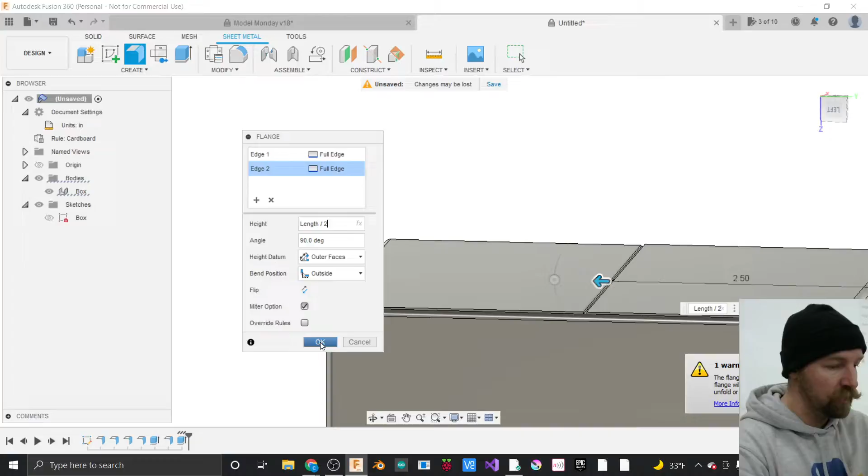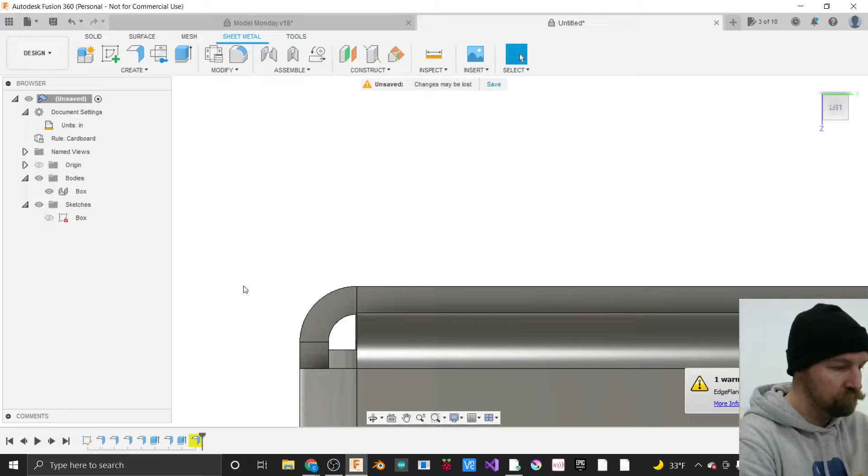Now, like I said, my flanges are clearly interacting with each other, so I just have to change this extrusion where I extruded this little height here. I just have to make that extrusion a little bit bigger. There we go. So now I have a nice little gap in there and things are not touching each other.

And we've got an almost complete box. The last thing we need to do is just make a top here. I'm going to make that top with one final flange. So I'll go over to the Create menu and choose the flange option.

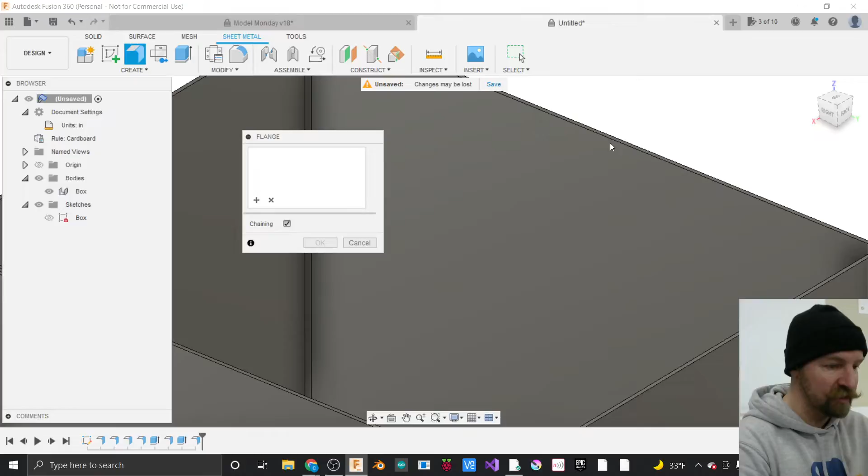Now we just have to make the top flange of our box by picking on one side, dragging it over here, ensuring we don't have things that are touching, specifying a distance of, let's call it width. That was the correct answer. And then say OK. And there we go. There is our box.

Now, we may have some questions. I kind of did those last little bits kind of quick. Were you guys successful at home?

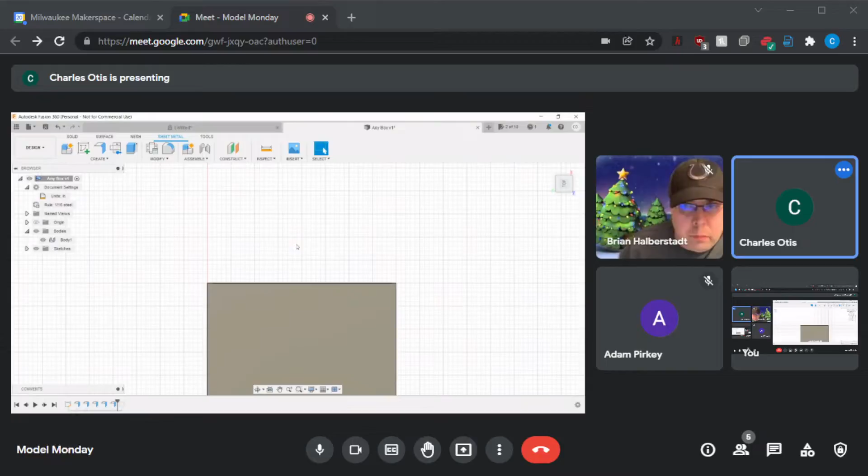I think so, I want to take it apart and do a layout to see it. Okay cool, so like you said, the next part is to do a layout, right? And do a flat pattern, and that is really the key. The first time I did this is where I found out that those edges touching was bad news.

So to unfold this into a flat pattern, in the Modify menu, we can say... oh, is it in the menu? Nope, it's in the Create menu. If you come down to Create Flat Pattern, assuming none of your edges are touching each other, and if you look down at your timeline in the bottom here, if some of your flanges are yellow, that's an indication that you've got some overlapping stuff there. So if you've got yellow flange icons, you might have some touching edges.

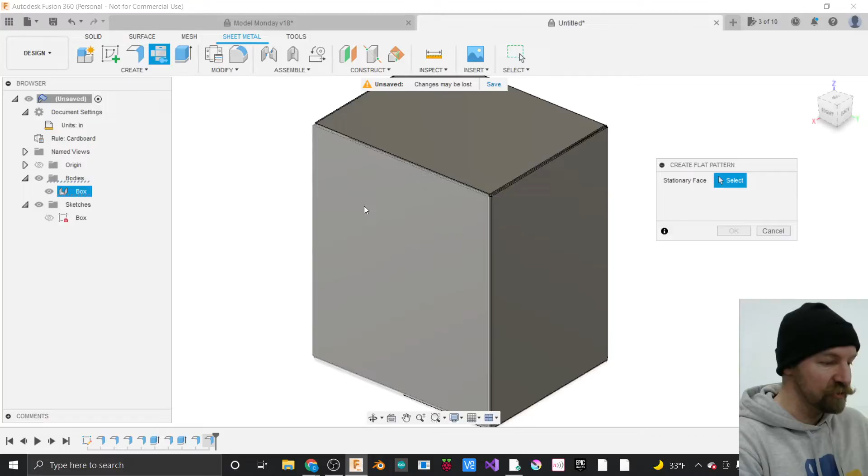But we have to click a stationary face here, so you really just have to pick any face, and then say OK. Oh, I got an error. More info.

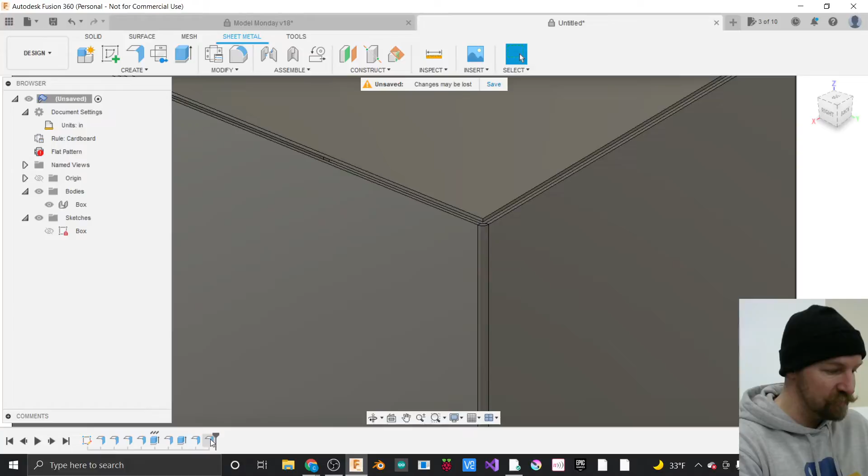Alright, I'm going to say Finish Flat Pattern. Let's try deleting this last one. Let's delete this flat pattern. Can I make a flat pattern now?

There we go. Alright, so something about my last flange that I made was touching. This very last flange here, something about the way I made this was touching something else in a way that it didn't think was friendly. So I'll try that one more time and see if I can find where it's touching.

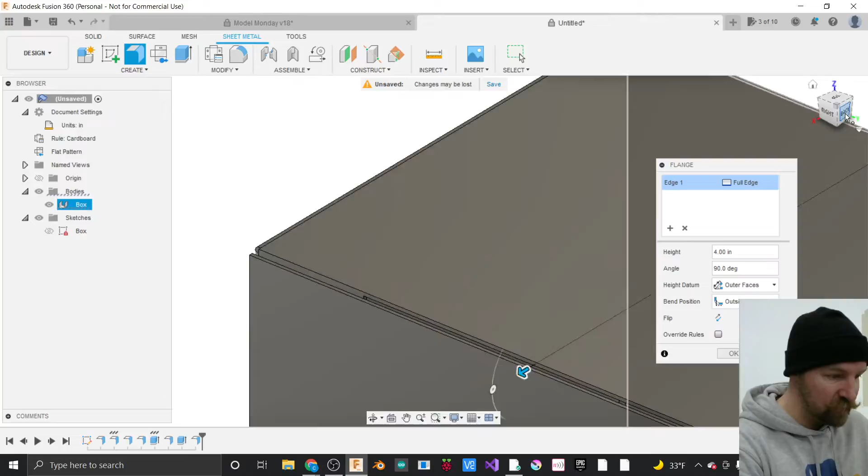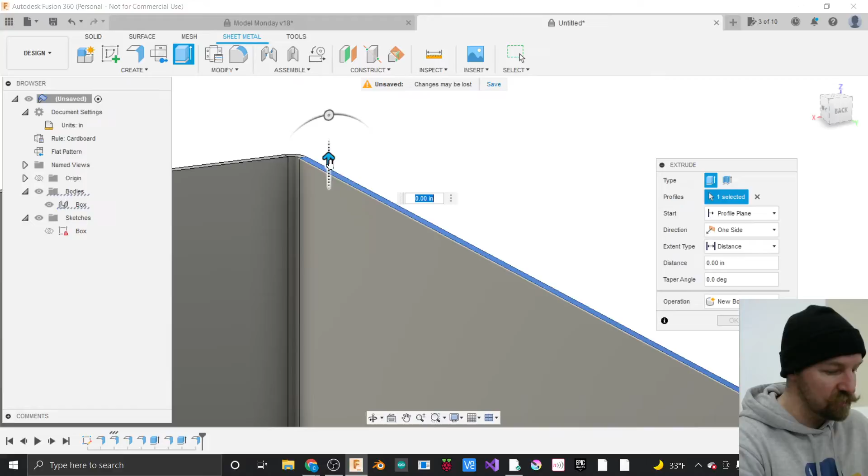I mean, it doesn't seem like it's touching. Oh yeah, but it's right on top of it. So what I'll need to do here is do that same trick that I did on the bottom. I'll come over to the edge and extrude out this little piece just a fraction of an inch, 0.01 inches. And now that I extrude this edge up just a little bit.

Now I can use my flange tool and drag this over, and I should be typing in my measurement here, which is width. Alright, so now, hopefully I'm going to delete this. I can come over and say create, and then create a flat pattern. Now I can specify a stationary face and say OK, and then it unfolds it flat there.